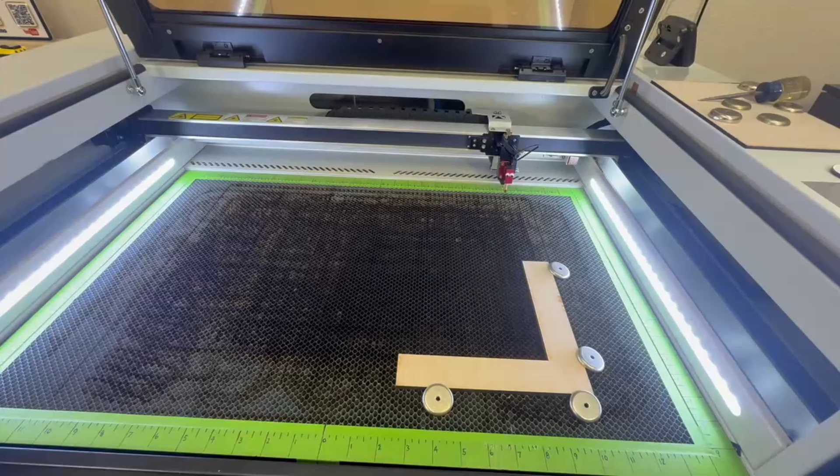I have already locked down a 90-degree L jig that is squared to the laser head in the X and Y direction. Doing this will always align your material. All I have to do is place the material flush on the X axis, then push it flush up against the Y axis. That's it. Doing that each time will align the material to the laser head and, more importantly, to the drawing in Lightburn.

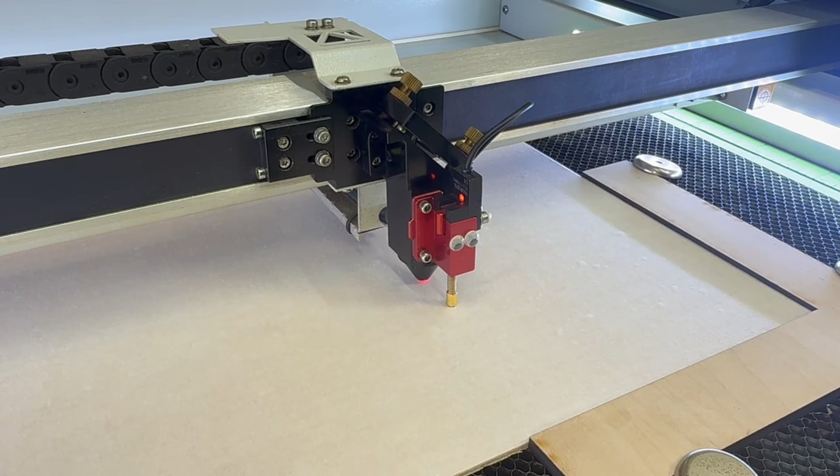Next, I'll do a quick autofocus of the 1/8 inch material. And now I'll set my all-important user origin for this project. Since I set the user origin to the bottom right corner of my sheet, I will move the laser pointer to that position. When I get close, I will slow down the jog speed to move the laser pointer to the corner. When done, I will press the origin button. I have now locked down the coordinates to this position.

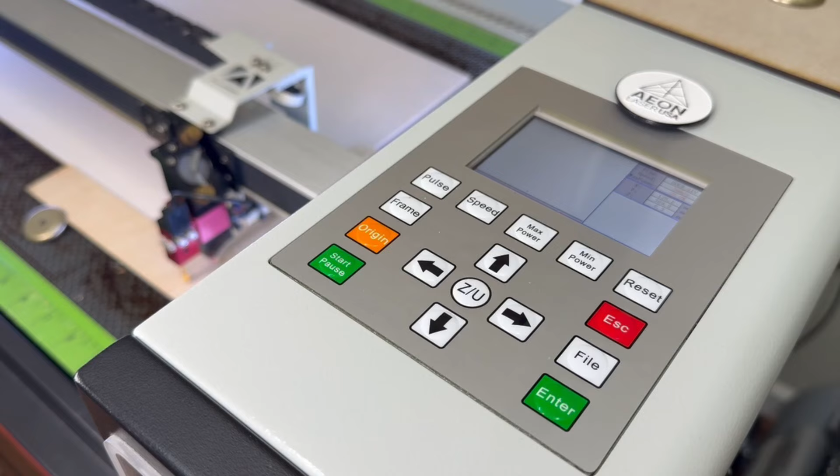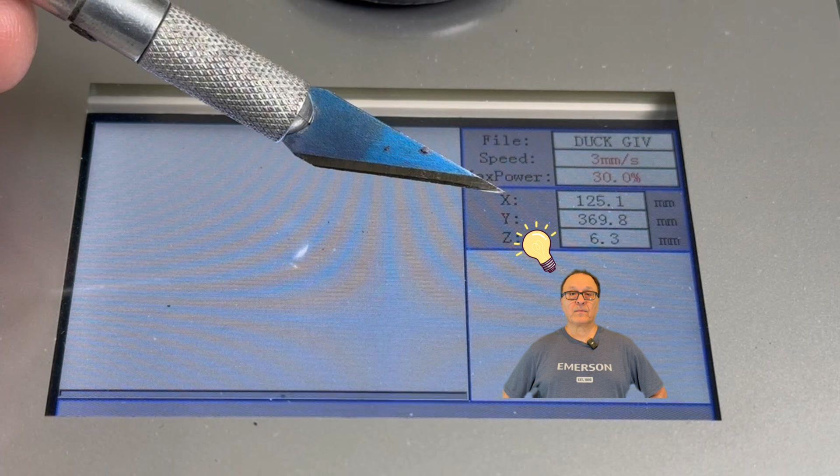Now here's a quick tip that I learned the hard way. Now is a good time to write down the X and Y coordinates, because if you accidentally press the origin button on a different position, the laser will now be locked into those new coordinates. But now that I have the original coordinates written down, I can precisely jog the laser head back to these coordinates, and there you go, you're back to your original starting point. I once had to restart a project because I lost my original origin positions.

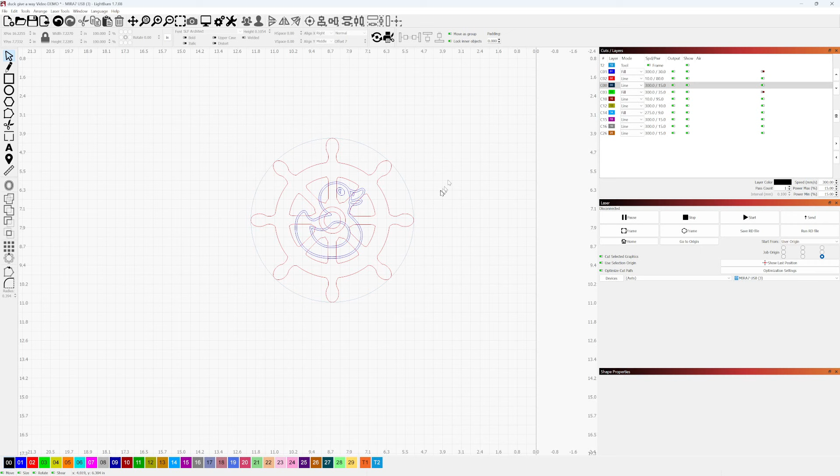Don't be that guy. Now here's a quick montage of the design build. I couldn't do this in real time because the video would be days long and nobody wants that. I used about every tool in Lightburn to get this design finished, and this is the final design I came up with. It has multiple layers that have different responsibilities. So I'll go from here.

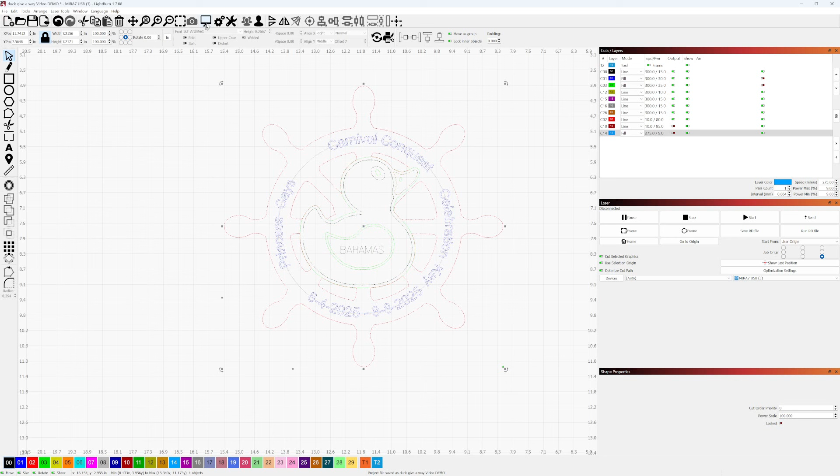Okay guys, here's the final design, and it's got a number of layers directly on top of each other. All of these layers that I created, I have given special colors, and each color is going to perform a different responsibility during this project. For example, let's go ahead and select all of them at the same time, and if I select preview, you'll notice that if I hit play, it's going to go ahead and score, it's going to engrave around the duck. And then finally, it's going to come around and cut the final shape of the steering wheel of the boat. But that's not what I want it to do.

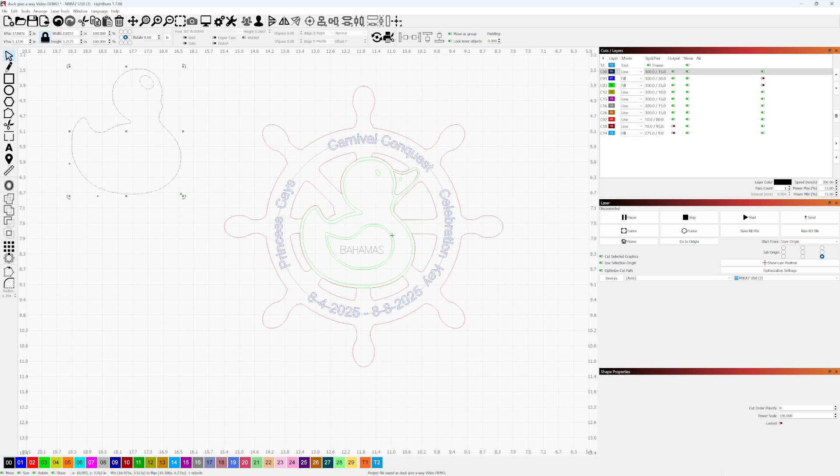What I want it to do is different things at different times because all these layers are stacked on top of each other, and each layer has its own responsibility. Let me go ahead and select this inner black part of the duck, and I'm going to bring it out over here. That was directly on top of the existing duck. This is the layer that I'm going to use to score, because I'm going to want to paint this part of the duck yellow. So I want to do this part of the job first. If I select it and press play, you'll see that it's going to score this area.

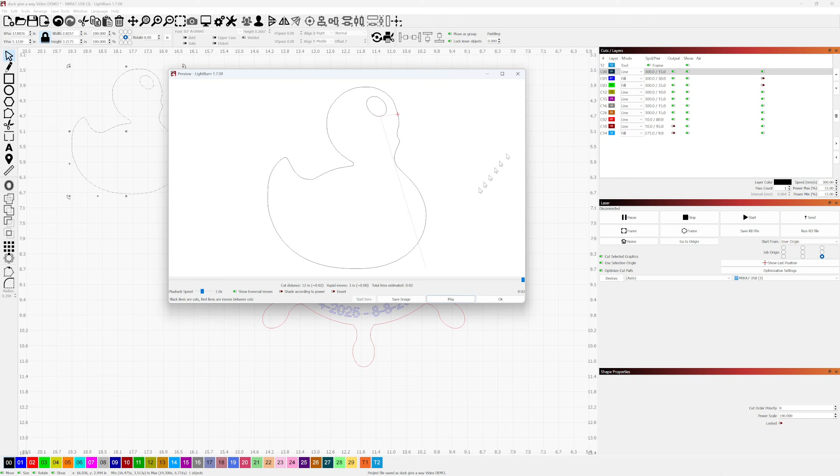And that's only because I have everything enabled. Throughout the job, I'm going to be turning on layers and turning off others. This is just to show you that each color has a different responsibility.

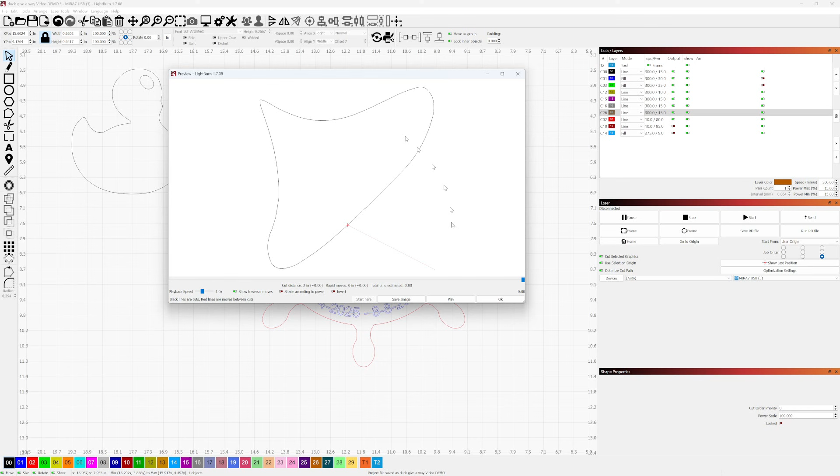So now if I bring out this beak here and slide it over, you'll notice if I click the preview button, it shows the beak. And if I hit play, it will just score the beak and the beak alone.

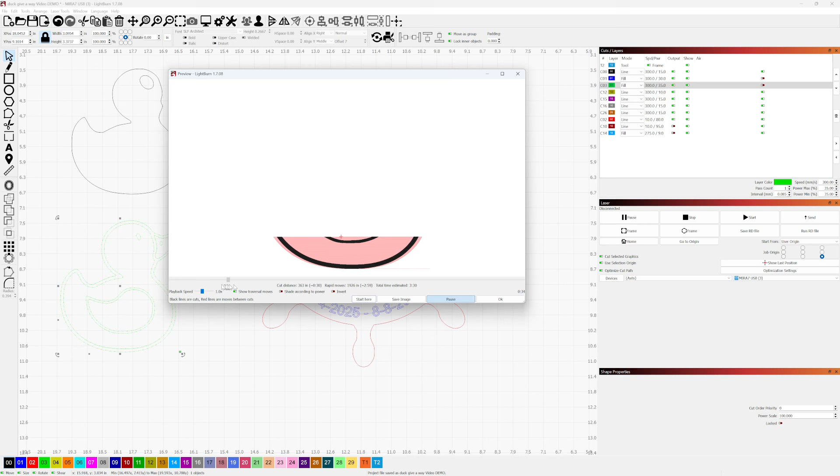Next, I have the green. If I bring the green out, this is the whole entire duck. So if I select it and click on preview, you'll see this layer is just used to engrave the outside of the duck, and it does a good job of engraving the outside of the duck.

Okay, so now we'll go ahead with Bahamas, and we'll bring Bahamas out over here, select preview, and you'll see that that responsibility is just to score the name Bahamas.

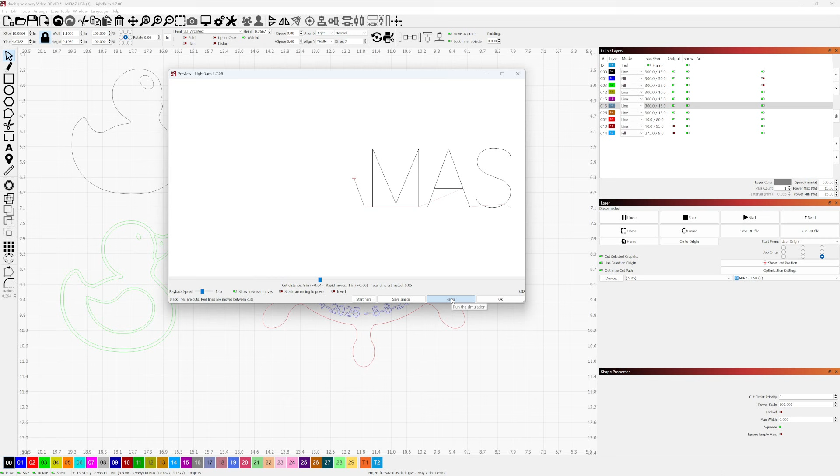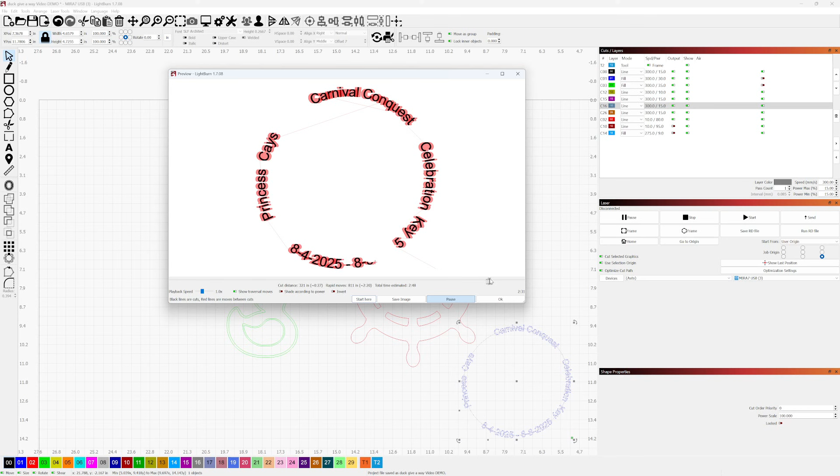Next, we'll go ahead and bring the wording around the circle out here. If I select preview, you'll see that this layer is responsible for just engraving the words and letters around the steering wheel.

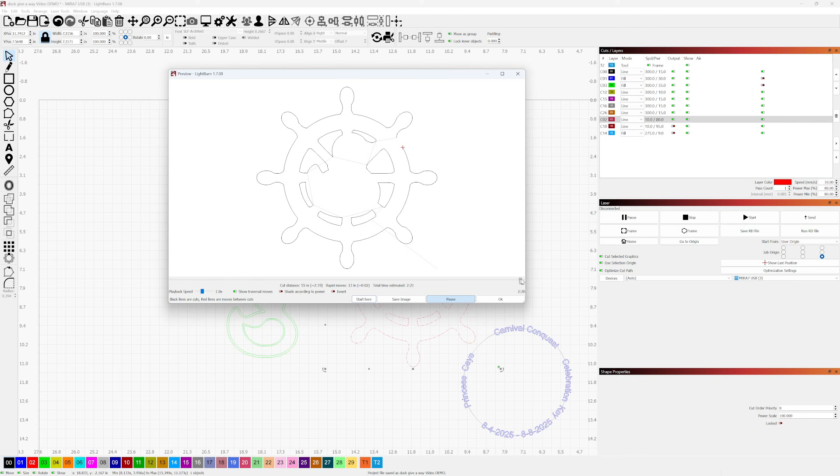Okay, and then finally, I have my steering wheel, and if I click on that and hit play, you'll see that this is going to be the layer that cuts everything out around all the scoring and engravings I did earlier. And of course, that's going to be done last.

Okay, so let me go ahead and go back and put everything back together. Zoom in, move it back, and then we'll go to the next step.

Okay guys, the next thing I'm going to do is select the rectangle tool, and I'll be making this rectangle a T1 tool layer with the bottom right corner being the user origin. I'm going to make a rectangle that's the size of my material that I'm going to be using.

And the material I'm going to use is 20 inches wide by 12 inches in height. So let's go ahead and type in 12 inches. So now I have it set for 20 by 12. That's the exact same size.

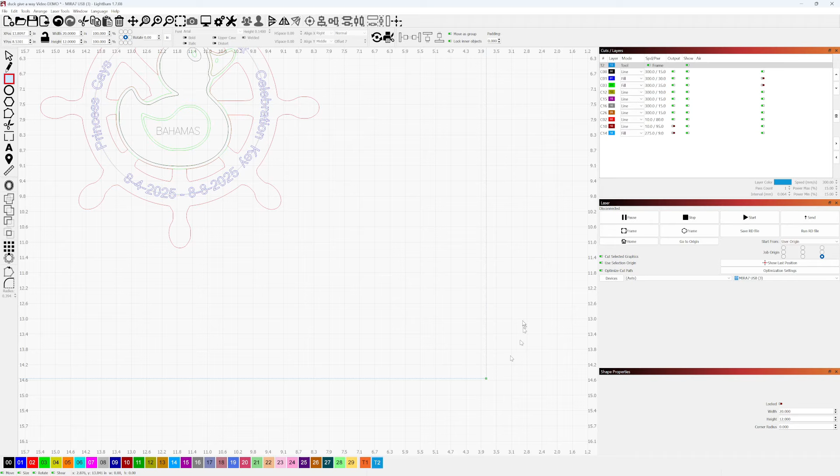And if you'll notice here, I have the user origin set for the bottom right corner, just like I do at the laser. I set the origin of the laser to be right on the bottom right corner of my material, so they're going to match.

So if you notice something real quick, you'll notice that my design size is way bigger than it needs to be. So I need to go ahead and scale that down to the size I want it to be.

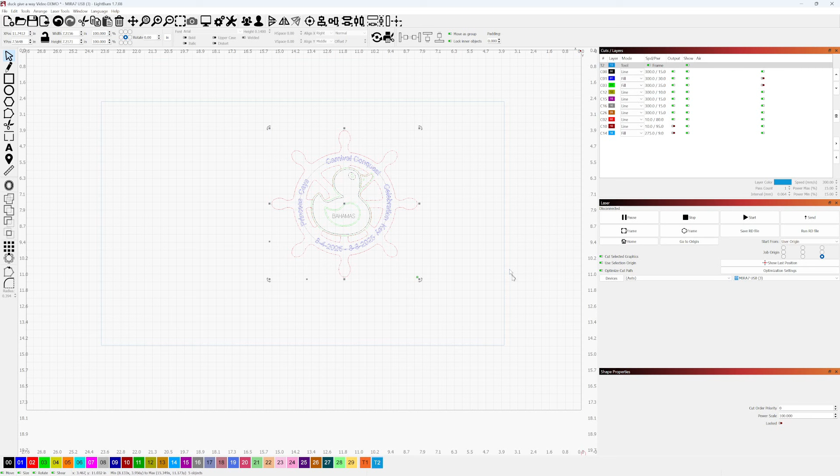So I have one here on the other side that I scaled down to about 2 3/4 inches by 2 3/4 inches. We'll go ahead and place that on the artboard, and we'll get this demo duck and move him out of the way.

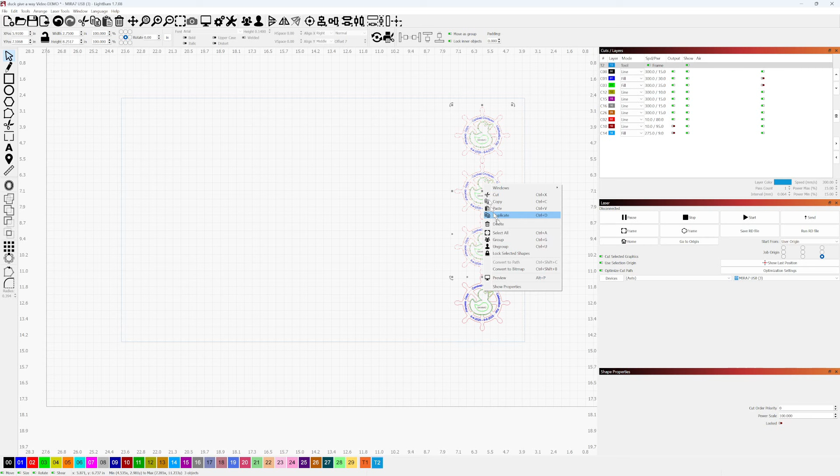Okay, so now using the array tool, I'm going to go ahead and stack about 4 of these on top of each other so I can get the maximum amount of designs onto this piece of material. So I'm going to go ahead and do a quick montage of that and get that done.

Okay, there you go guys. So I put 32 on that sheet, so we're good to go here.

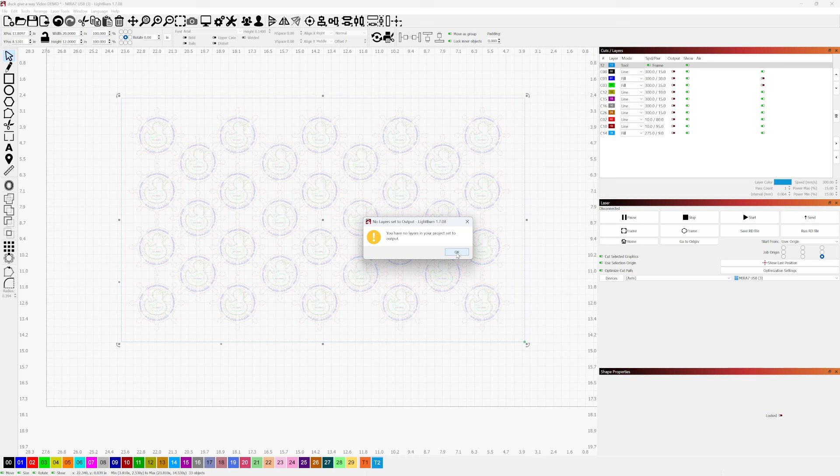So what I'm going to do next is turn off all the layers. All my layers are going to be turned off. So if I select everything and go to preview, it says, hey, you have no layers showing up, what do you want to do? I don't understand you.

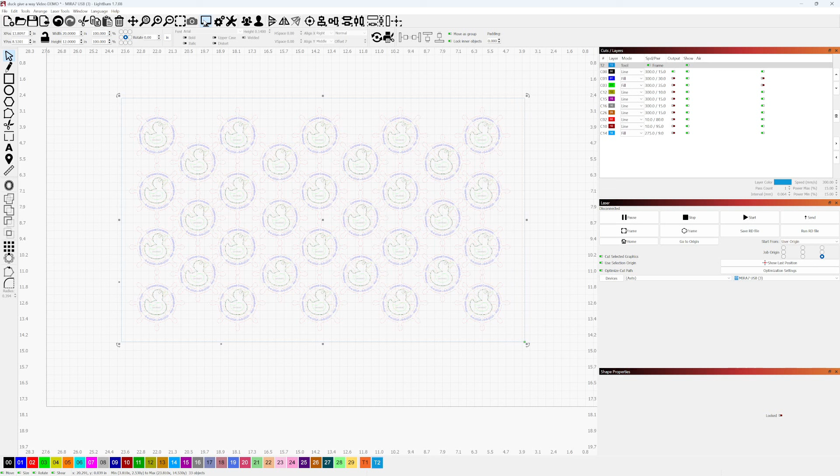So the first thing I'm going to do is select and turn on the output for just the duck that I want to cut out so that I can color it. So I'm going to go ahead and select everything. And now when I click preview, you'll see that it's just going to score all of my little duckies right there. So, okay, let me go ahead and send this job to the laser and get this part started.

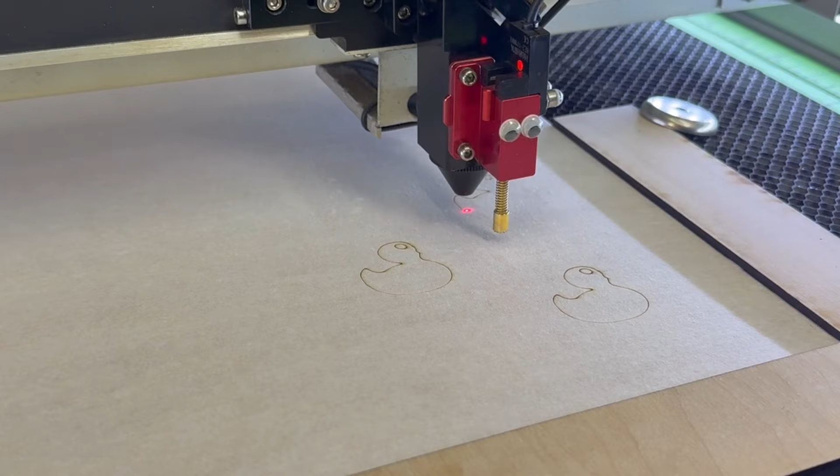Okay, now that this is done, let me take it to the workbench, and I'm going to get my X-Acto knife, and I'm going to start to pull off all the masking off of all the little ducks.

So now this piece is ready to take to the garage so that I can give it a few super light coats of yellow enamel spray paint. I shake the can vigorously before spraying the paint. I keep a distance of about 12 inches from the material. My goal is to apply a light mist onto the ducks. I don't want the paint to puddle and go underneath the masking. So I take my time applying light coats, letting it dry, then coming back and doing another coat. When done, I set it aside to dry and make sure it is thoroughly dry before putting it into the laser, okay?

Now that this piece is thoroughly dry, let me take it inside and load it onto the laser bed. I'm going to make sure to align this onto the L jig, making sure that I place it onto the X-axis and then slide it flush against the Y-axis. Okay, now it's time to head back to the PC to load the second part of this project.

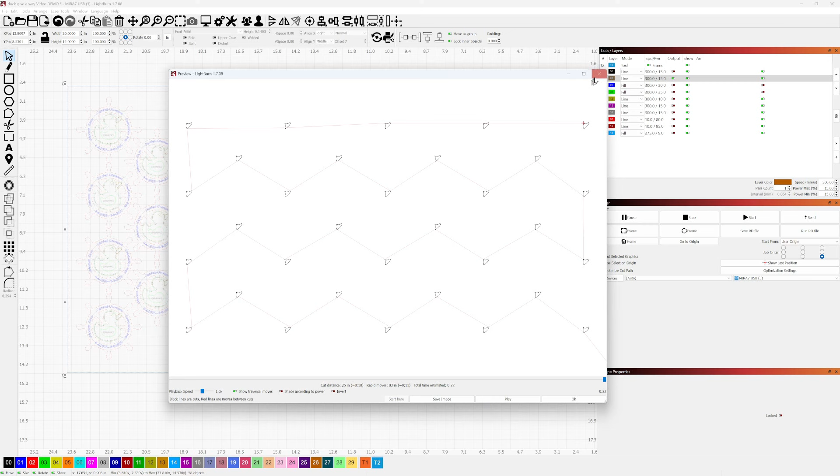Okay, now what I'm going to do is turn off the output to the last job I just sent, which was the duck. And now I'm going to turn on this next layer, which should be the beak. So if I select everything here and click on preview, you'll see that all these beaks are going to be scored. So let's just do a quick check, yep, all the beaks are going to be scored. So I've ensured that it's the right layer. Now that is turned on, let's go ahead and send it to the laser.

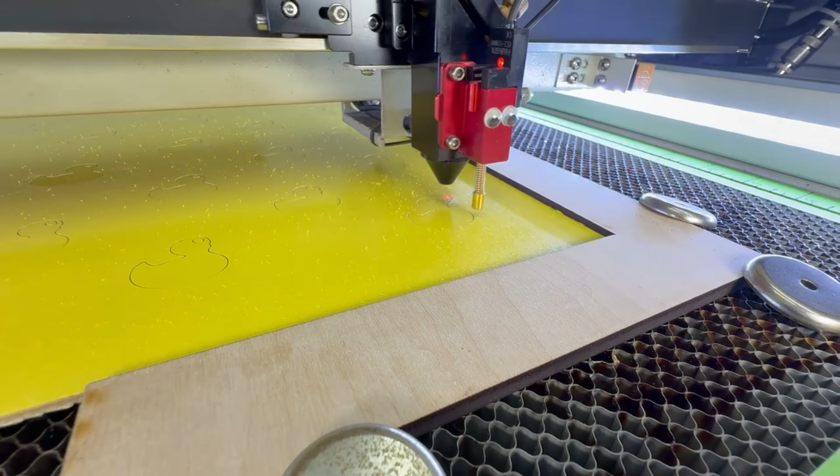Once the job is started, I can quickly see the beak is being scored and aligned with the previous score job of the duck's body. Any misalignment of the material to the L jig would have caused the pattern to be off a bit. So we are looking really good.

Now it's time for me to remove all the masking off the beak. So I grab an X-Acto knife and start to pull away all the small pieces of masking on the beaks. I then get my red paint pen and apply red paint to all the beaks.

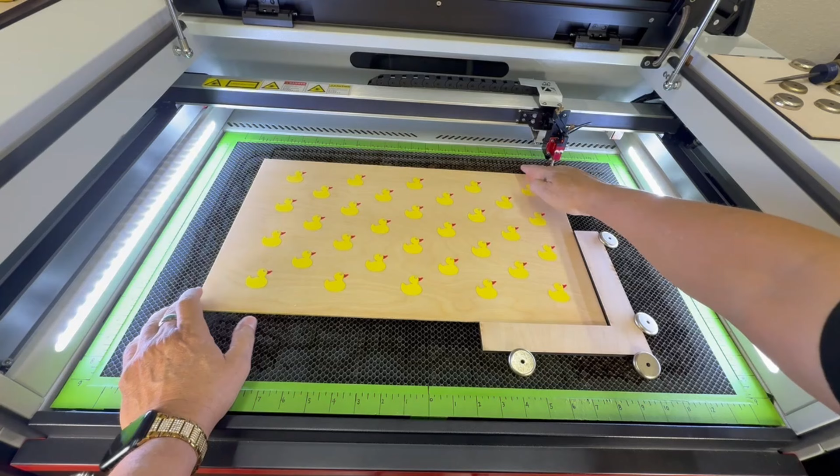Remember to properly adjust the material to the L jig. This will ensure that the next pattern aligns with the duckies. So now it's time to go back to Lightburn and load the next set of instructions for the Mira 7 to perform. Let's go. Okay guys, I'm back in Lightburn and I'm going to make some modifications to our cut and layers window.

I'm going to go to output and turn off the layer that just scored the beak. So now that is off, and I'm going to enable the next three layers: the blue layer, which is going to engrave the words and numbers around the steering wheel; then the next layer, which is the word Bahamas, scoring it onto the wing of the duck; and the third, the green layer, which will engrave all the way around the outline of the duck. So now that I have those three enabled, let me select the whole piece and go to the preview window.

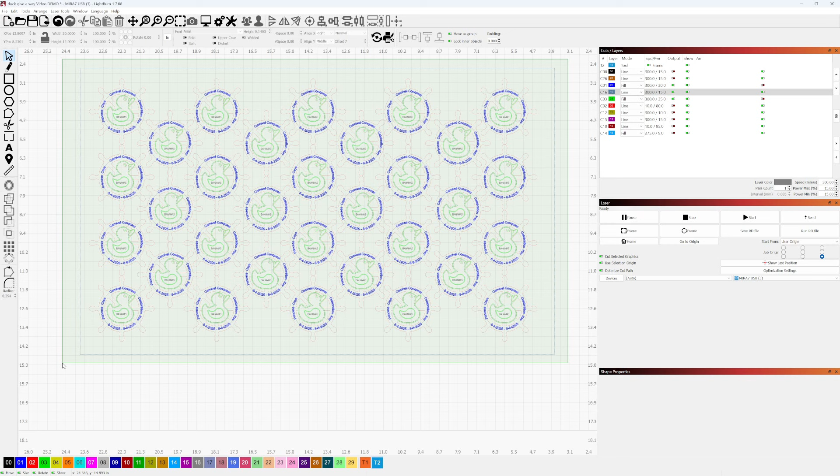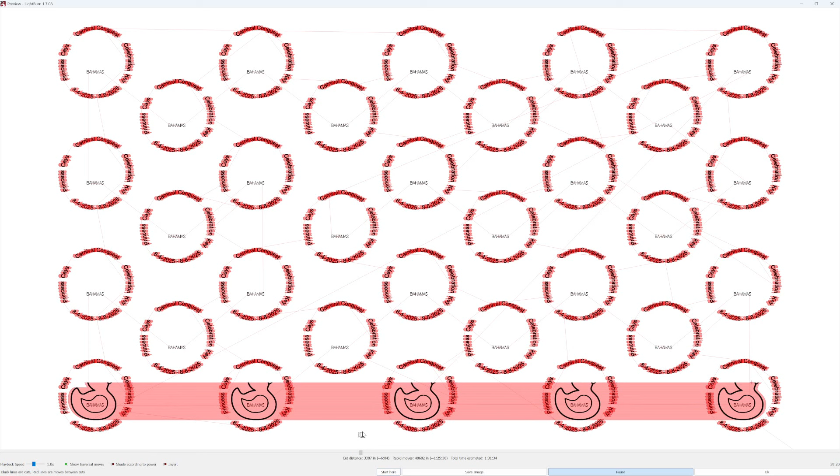And this is what I have here. I'm going to enlarge it and hit the play button to see how it's going to act. Let me speed this up, and you can see it engraving all the words and numbers around the steering wheel. When it finishes, it's going to score the word Bahamas onto the wings of all the ducks, and lastly, it's going to engrave the outline of the duck. So it's going to do everything I want it to do. Let me close this window and send it to the laser.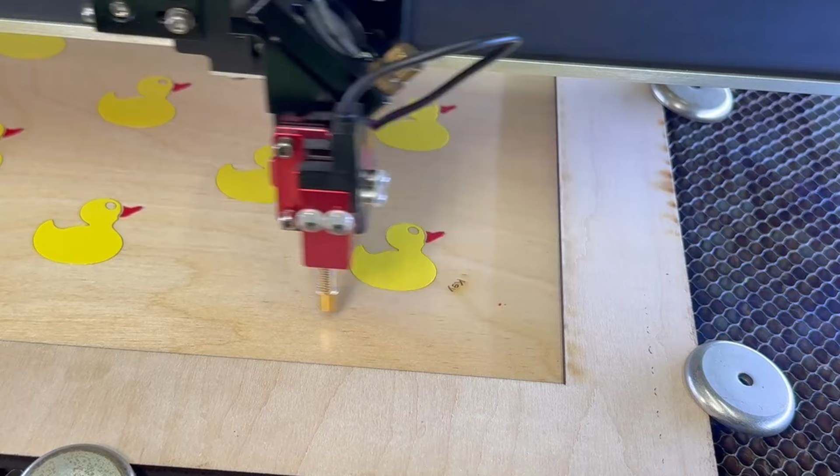Okay, now that the job has been started, I can quickly see that it's engraving exactly where it's supposed to. I can also notice a little engraving residue on the surface of the wood, but I'm not too worried about that because it can easily be wiped away later with a damp cloth. Let me allow the laser to engrave this first layer of text and numbers.

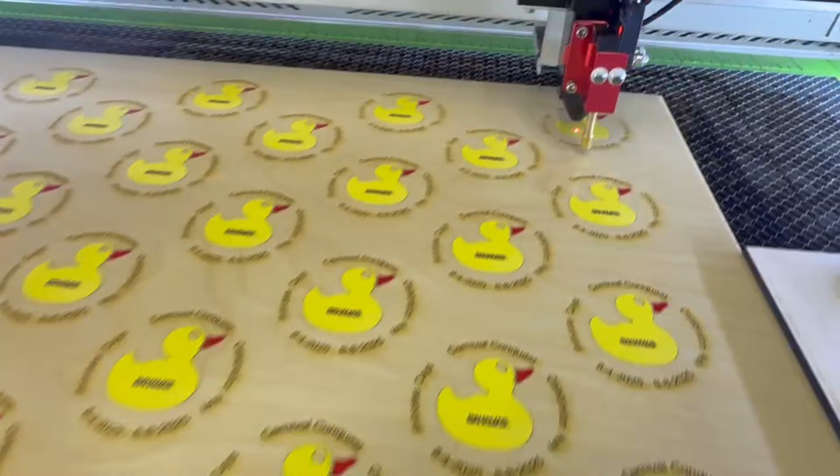At this point, I pause the job to give it a quick inspection, and with everything looking good, I hit the start button to continue. The Mira 7 is now scoring the second layer of this job, scoring the name Bahamas using a single line font that I selected in LightBurn. It's looking nice and crisp. This scoring layer should be done quickly.

When done, the Mira 7 now starts to engrave the outline of the duck as programmed. Since this is a thicker line, and since I used a higher power setting for this layer, there is more smoke and more engraving residue falling onto the surface of the wood. Let me let it finish this duck and I'll take a closer look.

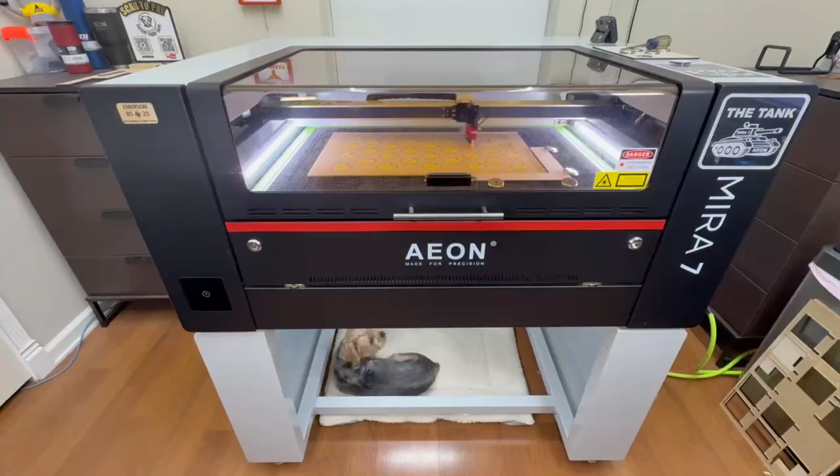Just as predicted, there's a whole lot of charring or engraving residue that is now dirtying the wood surface, and more importantly, making the duck need a bath. The duck is looking filthy, especially on the wing area and beak area. So I'll have to give the duck a bath when this engraved job is finished.

Now I remove the material from the laser and take it to my workbench for a good cleaning. I get a damp microfiber towel and begin to lightly wipe the residue off the surface. Because of the good hard poly coating on the surface, it is wiping clean quite easily. So now I'll wipe down the entire piece, and when done, I'll load it back into the laser bed to perform the last cut.

Okay guys, I'm back in LightBurn and I'm going to move over to the cut layers window. I'm going to turn off the output to the last 3 layers I just enabled on the last job - turn off the blue, turn off this gray, and turn off the green. Now that everything is off, I want to select the red layer, which is 02, and turn the output on.

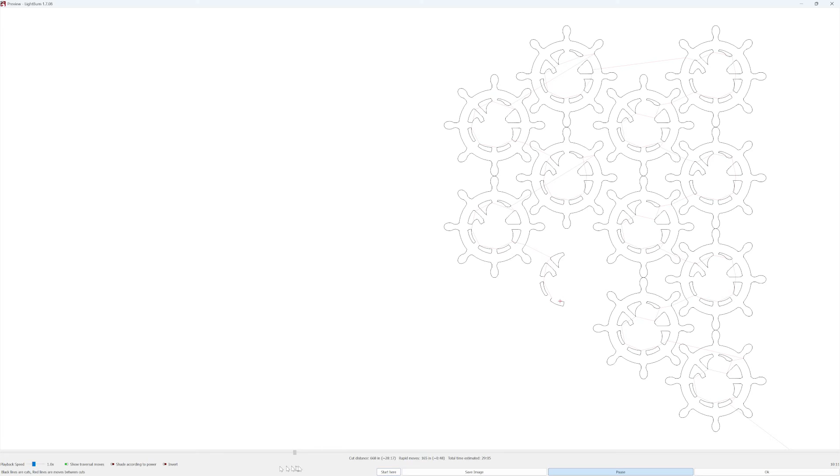So now that it's on, let me go ahead and select the entire drawing. I will click the preview button just to ensure that it's doing what I want it to do. You can see here, once I hit play, this is the layer that's going to do all the cutting of the steering wheel. So things are looking good. Let me close this window and click send to send it to the laser. See you at the laser.

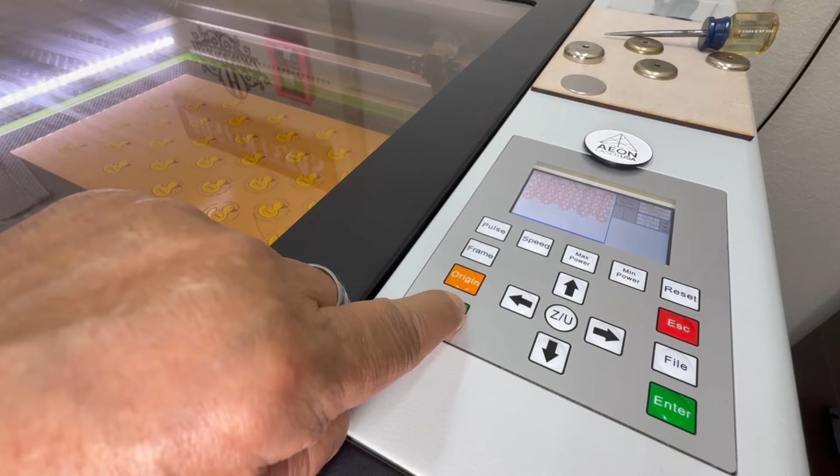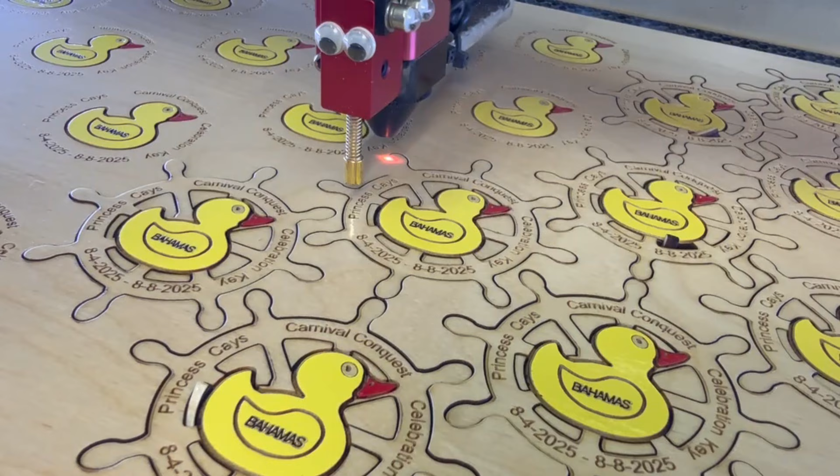Okay guys, this final cut is perfectly aligned and is cutting precisely on target. Also, having an external compressor running while it's cutting makes for a clean, deep cut and eliminates the need for masking and cleaning the cut residue after, because there's virtually no residue when you use an external compressor. So now that the job is finished, I'll remove the pieces from the laser and take them to my workbench to finish up this project.

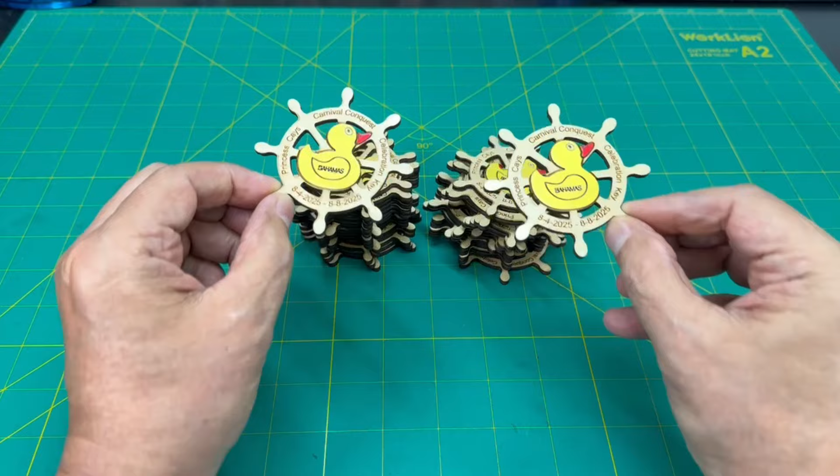So now it's time to take a close-up look at the final product, and I think they look amazing. The colors pop and the surface is nice and shiny. I'll finish this project by sticking a magnet on the back side so that someone can remember their cruise by sticking it to their refrigerator door.